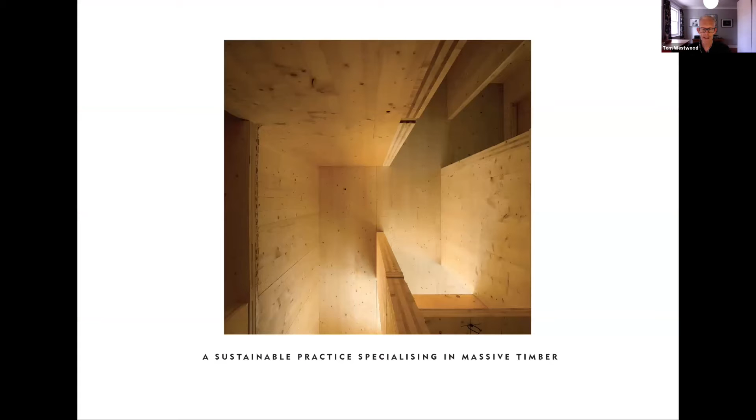So we specialise particularly in mass timber, which Alan will talk a little bit more about, some of the different types that he's used, but it's a range of materials that are timber planks or laminates bonded together to make larger structural elements, be they columns, beams, or panels, to enable us to build with timber, but in a very modern way. So I think what I should really start with is why is embodied carbon so important? I think some of you will have heard other talks on this today, but it does form a really key part of why we are so passionate about building in timber.

Over the last 20 to 30 years, building codes and building regulations have made great strides towards improving the energy efficiency of buildings as they run. The energy used to heat them, cool them, light them, etc., is reducing all the time, and governments are insisting on that, which is a fantastic thing. At the same time, though, legislation has not really come into place to reduce the amount of energy used to actually build those buildings in the first place. And as buildings become more and more energy efficient to run, proportionally, the amount of energy that goes into building them in the first place becomes more and more significant in terms of their overall carbon footprint.

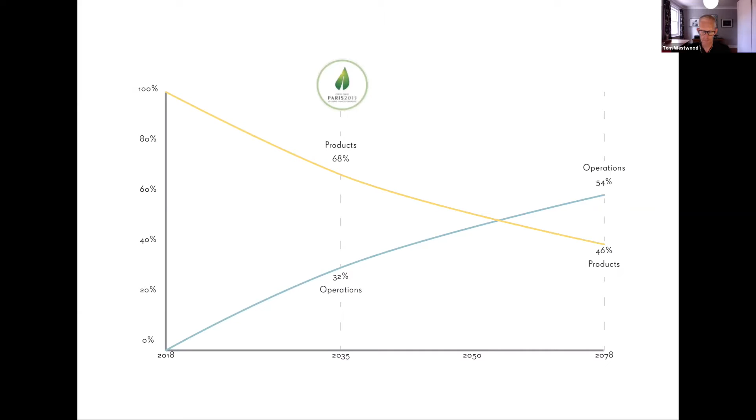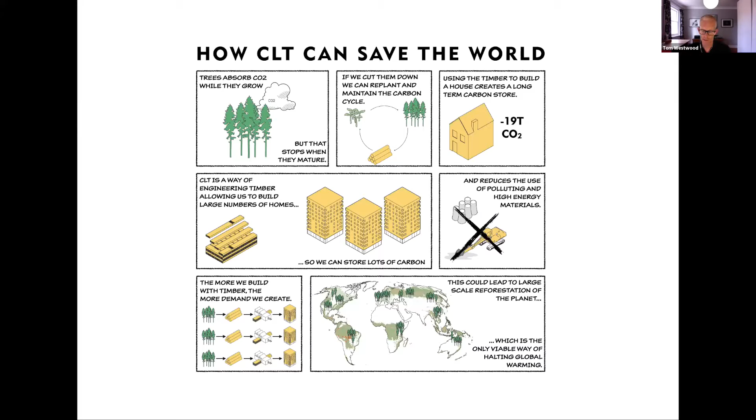And it's really this circularity that is so important with timber. Beyond it growing, then when it is processed, most factories and plants that process timber to be used in mass timber products use the offcuts of timber to actually help power the factories themselves. So they're incredibly energy efficient plants and factories.

Then you can use timber to build buildings on site. And then at the end of those buildings' lives, obviously we hope they'll last a long time, but if they do become redundant, that timber could then be taken apart again and either burnt to make energy, giving it a second life, or actually reassembled into other buildings. So it's a fantastically energy efficient process in total.

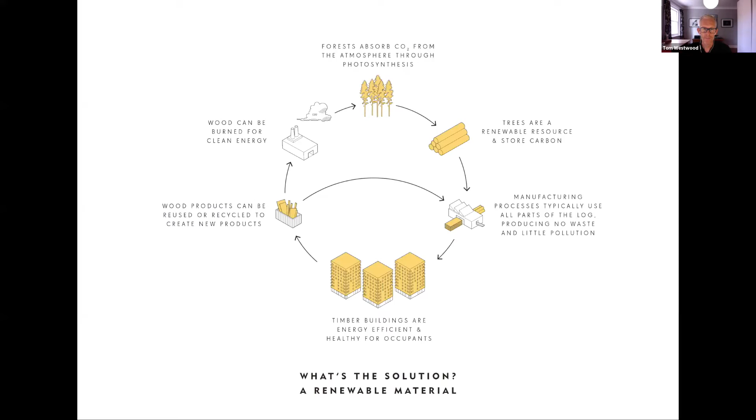So beyond that, working with timber has great benefits for buildings in general. Aside from the fantastic attributes it brings from a sustainability point of view, it tends to be quicker to build with when compared with a concrete building, because you're using prefabricated elements that can be joined together in a more efficient way, quicker on site.

It's a lighter material compared to concrete, 80% lighter. So whilst the building itself, once all the other materials are added, won't be 80% lighter, a completed building in CLT rather than concrete tends to weigh perhaps about 70 to 80% in total of the same building in concrete.

It's a much more accurate material than concrete in terms of tolerance. So because all the elements are prefabricated, they can go together more tightly, which really improves air tightness and reduces snags and defects on site. Fewer deliveries are required to site compared to a concrete structure. So fewer lorries on the road, less pollution, less noise, less disruption from those lorries.

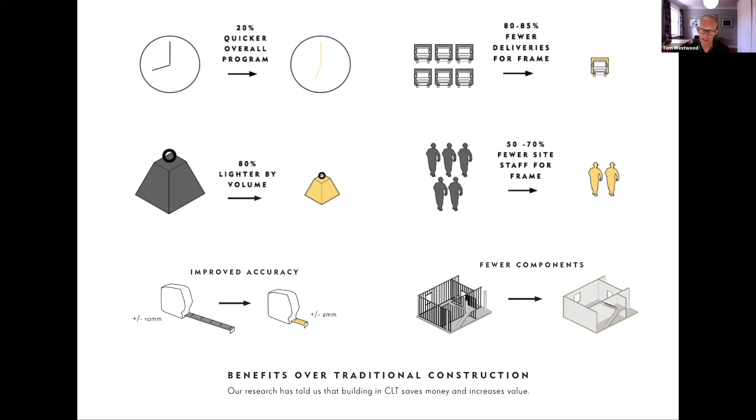It takes fewer people on site to assemble the building. So again, that makes a safer, quieter, and potentially cheaper workforce on site. And there's fewer components overall. Cross-laminated timber particularly can be used for floors, walls, stairs, lift cores, etc. So it has multiple purposes versus a concrete frame building that then needs different materials added to it to get to the same level of completion.

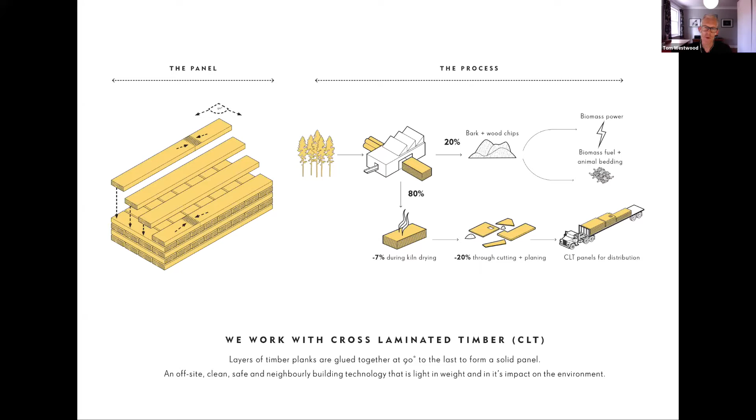So what is CLT? Some of you will know this, but for those of you who don't know the material so well, it's an incredibly simple material formed of planks of timber, very regularly sized planks, which are spliced together to remove knots and defects, and then glued together in layers at right angles to each other to create large panels. I've talked a little bit about how it's processed, but again, to reiterate, the factory process is very energy efficient in itself.

So I'm now just going to go through a few projects that we've worked on over the years, and talk through some of the different sectors, different types of structure used, and how we've experimented and learned from those. Our first major building in mass timber was a block of apartments, nine stories high, Murray Grove. And what we really looked to investigate in this building was how as many of the elements as possible could be in cross-laminated timber. So all of the internal walls, external walls, roof, floor, stairs, lift core, and that means that each of those elements can be relatively thin, as thin as possible. So that was the real concept behind this project.

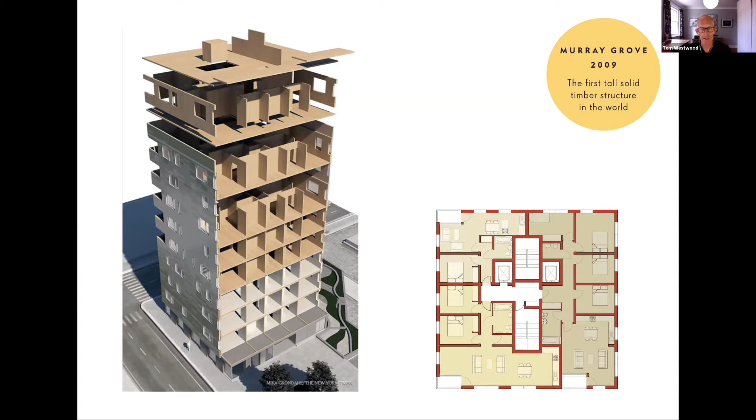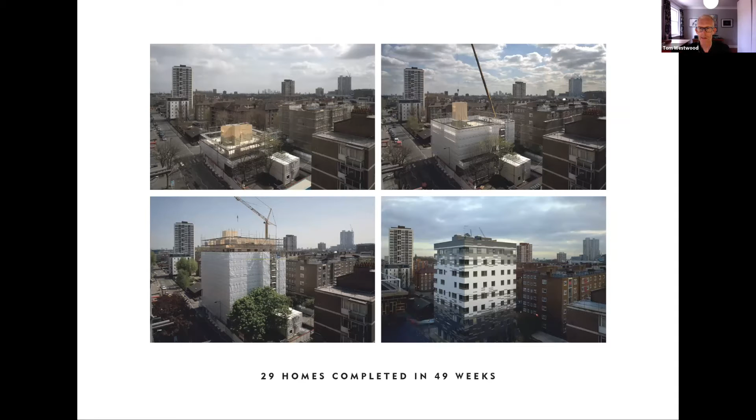And I think one important thread I'll talk about over the next few slides is timber is a beautiful material, as well as being very efficient and sustainable. And in the right circumstances, it's great to show it off. But equally, we think it's incredibly important that the world realizes that it's a very normal building material and can be used for everyday buildings all the time, without having to necessarily spend lots of time showing it off. It can be hidden away and still do a fantastic job, particularly for climate change.

We then, with our learnings from Murray Grove, worked on a much larger apartment block, which again is a very regular kind of building, the kind of building that everybody needs in the world. And there's absolutely no reason why these can't be in timber, and we certainly proved that with this building. Alan will also touch on this building later, as we worked on that with Ramboll structural engineers.

And one of the really key reasons for using timber on this project, and reasons why the client was persuaded to, was because of the lower weight compared to a concrete building. There was a future underground train line under the site, which meant we couldn't use piles. So we had to use a concrete raft, and that limited the total weight of the building. And because the building was in timber rather than concrete, we could build a bigger building. So a great benefit to the client.

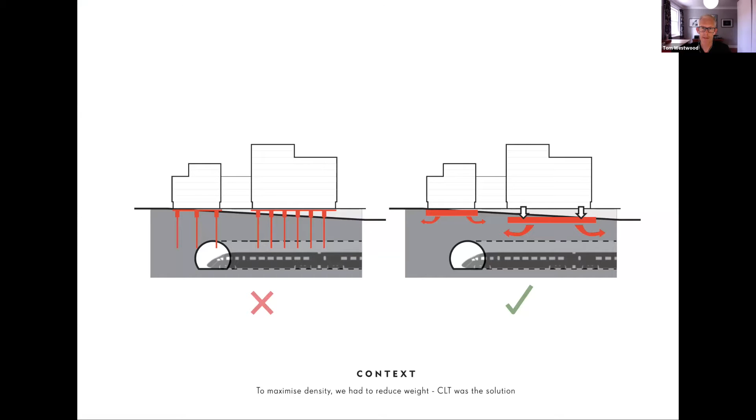So this really demonstrates a few of those benefits. So yes, 25% fewer homes could have been built if it were a concrete frame because of the weight. In terms of lorry deliveries, Ramboll helped us analyse this and worked out that there were 78% fewer lorry deliveries to the site compared to a concrete building.

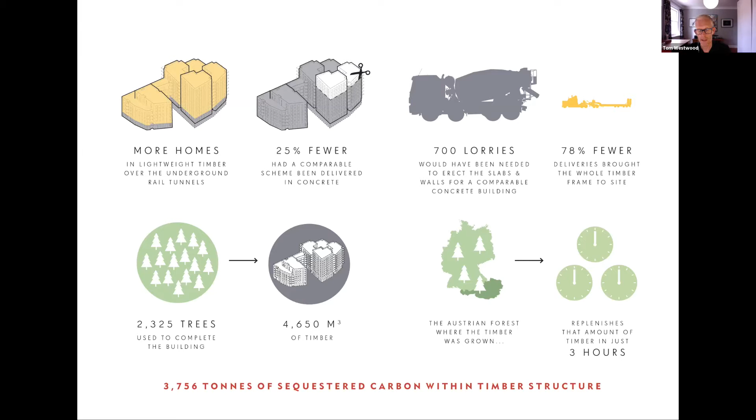And some people are concerned sometimes that if we built everything in timber, would we run out of trees? It's a valid question, but we're an incredibly long way from that. And in terms of the quantum, the trees used to build this building would have only taken 3 hours to grow in the forests in Austria from which these came to build the entire building. So yeah, we're a long way from running out of trees.

So we then moved on to look at different sectors, how we could use timber in different sectors, but also in different ways and in combination with different materials. So this is a building which has now recently been completed, a commercial building, 6 stories. We're using metal and timber together. So a very simple concept, and one that I think will help pull people into and persuade them to use timber, perhaps if they want an entry point rather than going straight to a pure timber building.

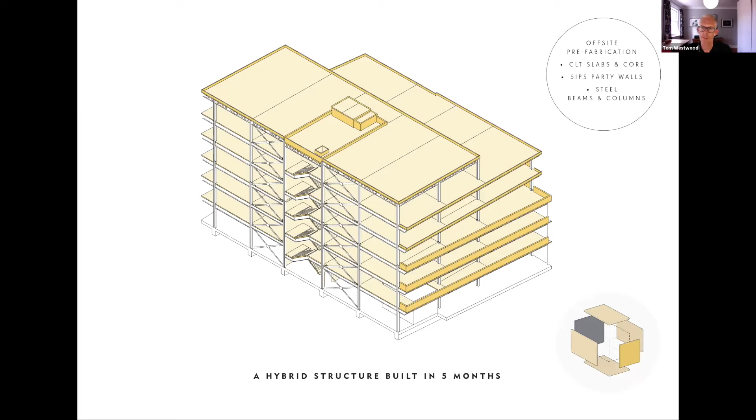So this is a steel frame, largely steel columns and beams, but then using timber for the floor slabs and the core, and really swapping those out for where people might typically use, say, a rib deck or precast concrete. And again, an image of that showing it's a very straightforward construction, very approachable, very easy to understand.

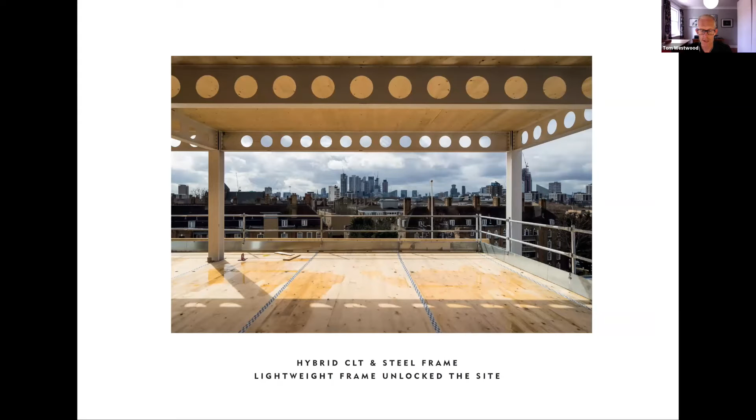We can also use timber to extend existing buildings, which is also incredibly important in terms of tackling climate change and conserving embodied energy. And so in this project, we both extended an existing concrete frame vertically, but also a large extension at the rear of the building to make a much more modern commercial building.

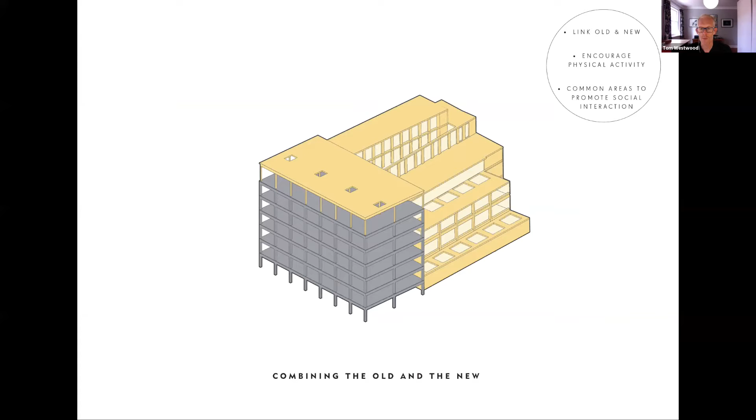And inside this building, we felt like we did have some opportunities to celebrate the timber, to show it off, to expose it. And if you can do that, it's, again, really fantastic material to work with when you can express joints and bits of construction that really add to the joy of it as a building material.

We then also experimented with using it in a factory building. And in this building, the particular sort of system that we used was key. The client and us were very keen to develop a kit of parts, in effect. It's a very regular building, so we built up a kit of beams, columns, and wall and floor elements that could go together to create a very simple construction process. In fact, the whole frame that you see here in the photograph was erected in just 6 weeks on site.

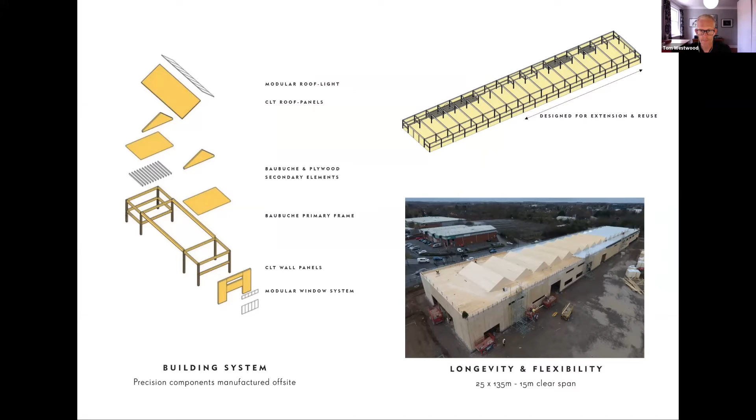And again, in this project, there was a real opportunity to celebrate the timber, to show it off. The client was building this factory for his own business, and so he was keen for it to be as economical as possible. And one way to do that was to have no internal finishes. So the timber is the structure, is the finish. There's no plasterboard, there's no paint.

So great savings on time and money in building in this way, on top of the beauty of what you can create. The timber is a warm, rich material, and fantastic to be able to expose it in buildings, and people tend to respond incredibly well to timber finishes.

So then briefly to talk about what we've looked at beyond that. Well, I've showed a few projects that are mostly working in the sort of panelized and flat pack approach, but you can also combine these elements with either prefabricated pods, or perhaps create a completely modular, totally prefabricated type of building system. And that's what we've worked with over the last few years in some projects.

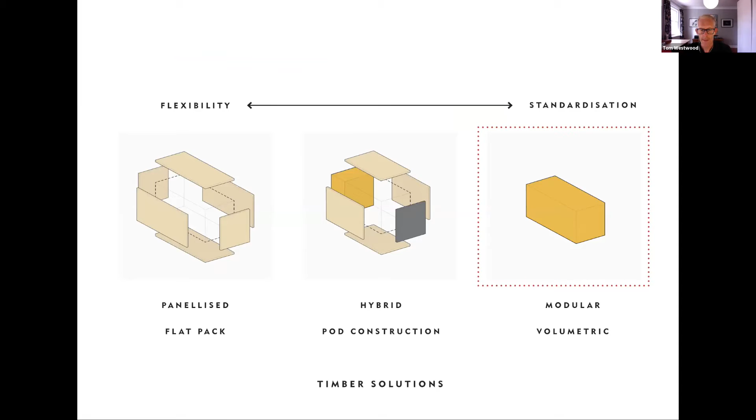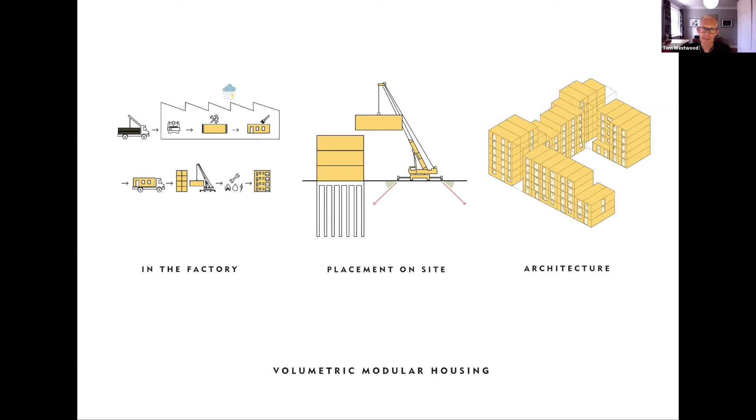So this, again, is a very typical residential apartment block, but in fact is built from timber modules. So very typically sized modules, but built with cross-laminated timber in the factory and fitted out in the same way as other modules. And that gives you all those modular benefits of speed, efficiency, quality control, but also with great advance in sustainability by using timber, and also rigidity is great.

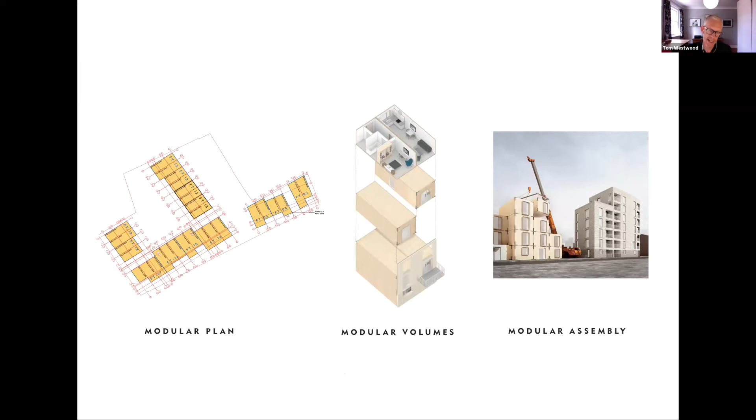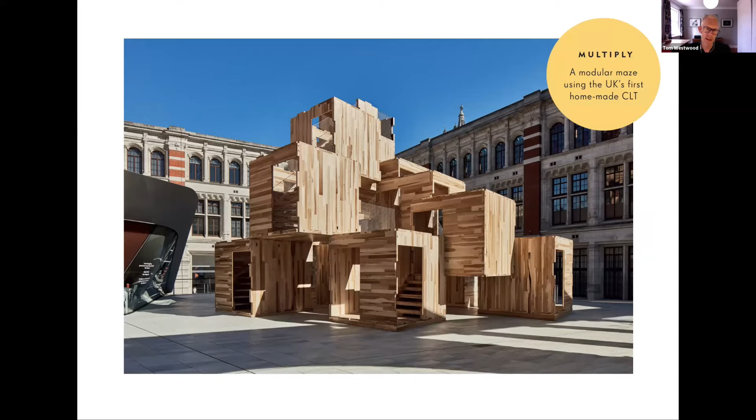And very simply then delivered to site and craned into place. And finally, I just wanted to end with a project that we did, which was a pavilion. And just like this lecture series was really about education and exposure for timber, really trying to demonstrate, particularly to the general public, that you can build in timber, in modern timber. What is mass timber? What is engineered timber? And to get people interested, to get people asking questions, and realizing that there can be a greener future

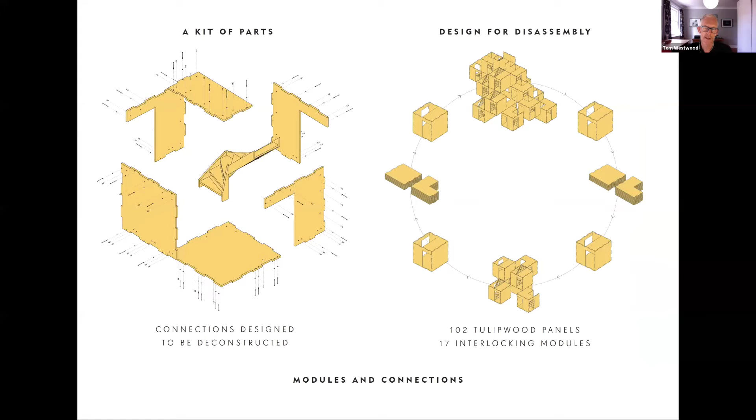for the construction industry. And particularly in this project, we wanted to go that final step into the circularity and look at how elements can be reused. Obviously, there's a great risk with the pavilion that it's up for a few months and then gets thrown away, and we were incredibly keen for that not to happen. So these building elements are all flat pack and all bolted together, so they can be simply disassembled and re-erected. And the timber itself, the cross-laminated timber, was made in the UK, again, to test how feasible that was.

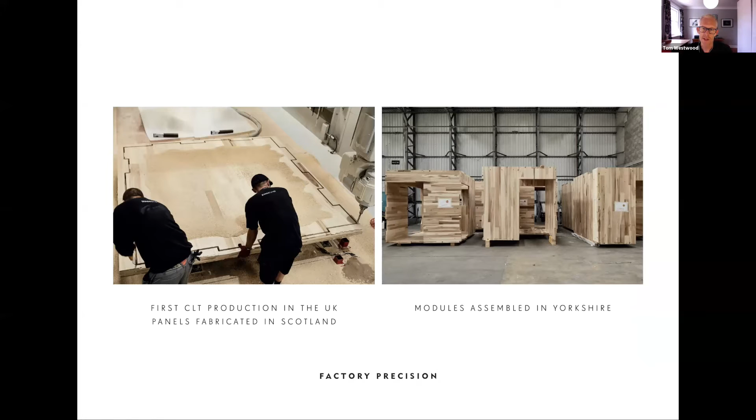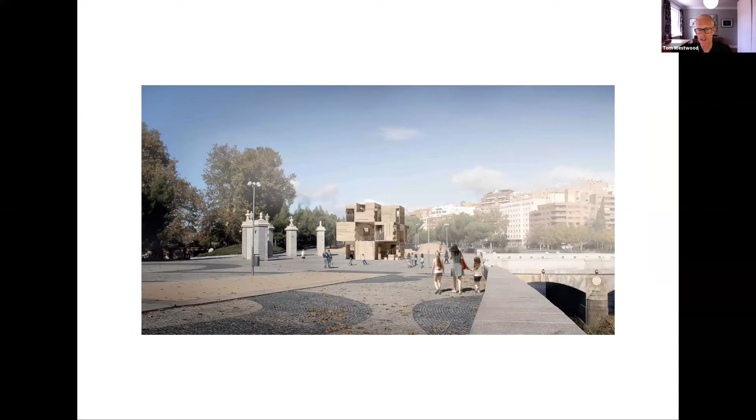And so it did have a few other lives. It went to Milan, where it was erected in a different format for a design festival. And then it also went to Madrid for another design festival. So really proving that whilst it may seem like a pipe dream, you can reuse building elements. Thank you very much.

Great, thank you, Tom. And with that, we'll pass it over to Alan. Hopefully you can tell me if my screen is sharing. Yes, but not seeing the presentation. Oh, there it is. Yep, you're good.

Okay, great, good. So you've really introduced who I am. I would just say I'm a structural engineer with Ramboll for about 14 years now. And very quickly, from the start of my career, I sort of fell in love with timber and using timber as a material to design with, and tried to pretty much focus in that direction for the rest of my time with Ramboll. And over that time, I looked at contributing to books to help inform and educate people out there that this is a great material to use, and this is how you go about using it.

And within Ramboll, because we really love working with it, we want to hold on to our designs and be able to not only do the design strategy at the early stage of a project, but carry forward our design responsibility into the detailed design. So that's designing all of the nuts and the bolts and the screws, which doesn't always happen within our industry, certainly in the UK, and then see that forward through to delivery. And when you do that for a prolonged period of time, nearly 15 years, you really do learn quite a bit, and almost what not to do as well as what to do.

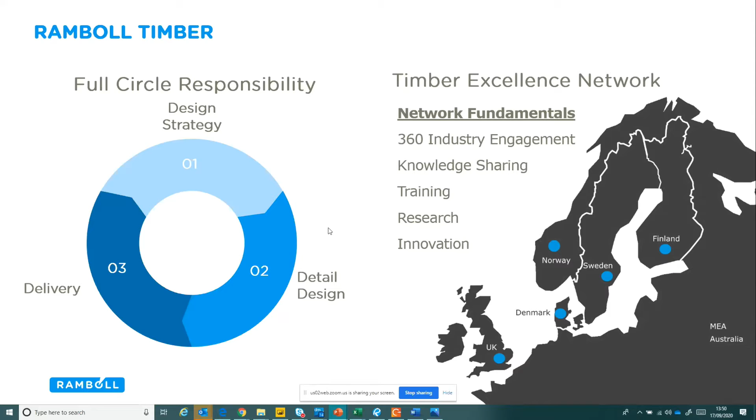And then we're trying to disseminate the knowledge that we learn into a wider community, and look at what's called a 360 industry engagement, and look at all the stakeholders within our construction industry, whether that's through training or research or innovations, to try and spread the knowledge of how to go about designing timber, knowing the pros and cons, and being able to use it in the right manner. And so over that history, we've worked on nearly over 100 timber buildings. It's quite a significant amount of timber volume and floor space that's being created in, I suppose, a relatively short period of time.

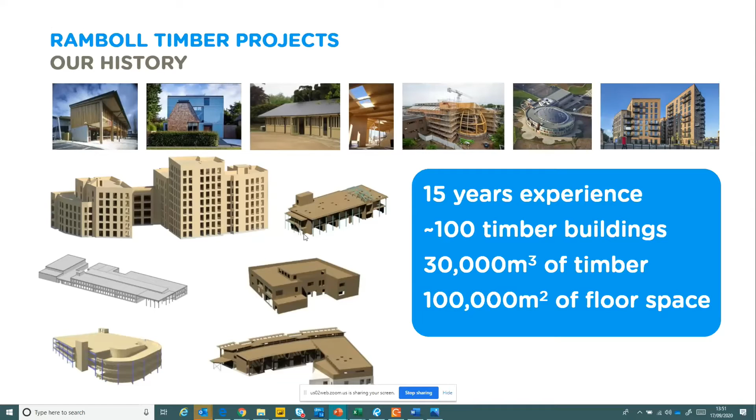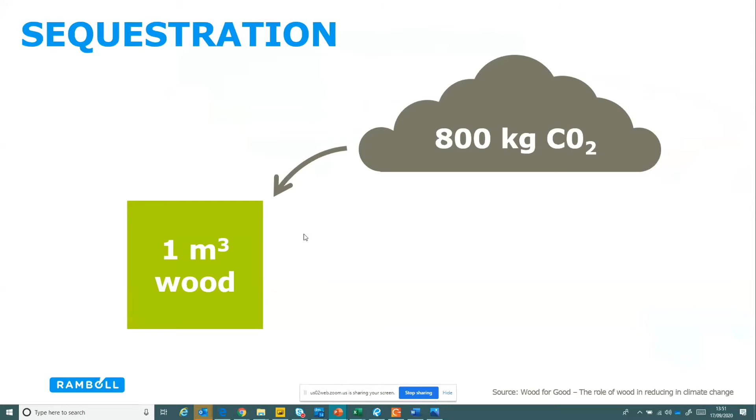And just to echo what Tom said earlier, it's really great to be here, to be able to address the issues that we're currently facing in terms of sustainability. I think timber really can be a part of a solution here, because there were talks earlier about sequestration in timber and how much carbon can be locked within our buildings if we build them out of timber, making them carbon storage. And also being able to compare with different materials within our buildings.

And this is something that we're doing quite a lot these days in terms of carbon accounting, to help drive the decision process. So what is the embodied carbon intensity within your building? How different can it be if you were to use a timber element? Even if it's a lower intensity structure, as Tom covered, but also what carbon is it storing within there, and how does that impact your calculations?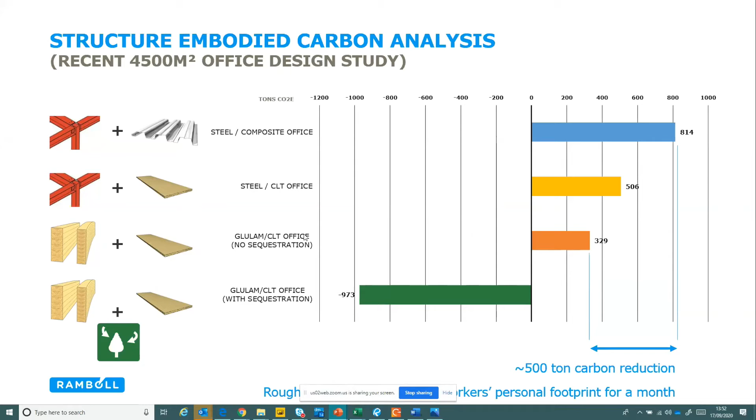Quite recently, we're looking at a tall timber building, which would have 10,900 meters cubed of timber. The client asked us, well, how many trees is that? I said, well, okay, we'll have a look. We did some digging, and that volume of timber is around about 31,000 trees required to fill that timber. Although not all of the tree would go into the CLT in this case.

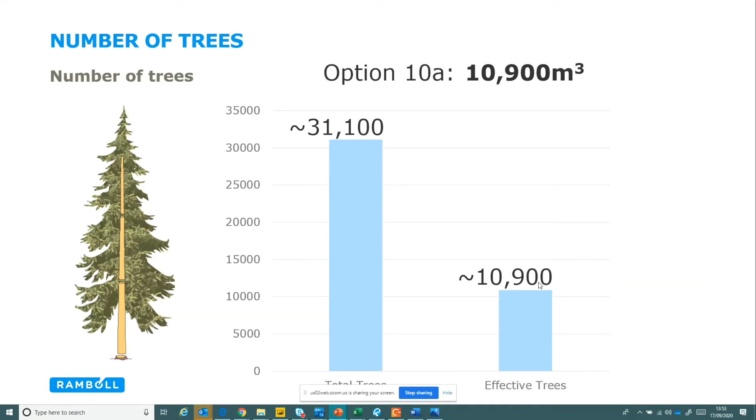So a third of that would be in the CLT, and the rest of it would be in offcuts and various other bits and pieces. So you could say it's 10,900 meters cubed of trees within that building. But the great thing is looking at the figures of how quick that grows in terms of the forest, which Tom also touched on. On a good day in Austria, you get a meter cubed a second, which I think is a fantastic statistic.

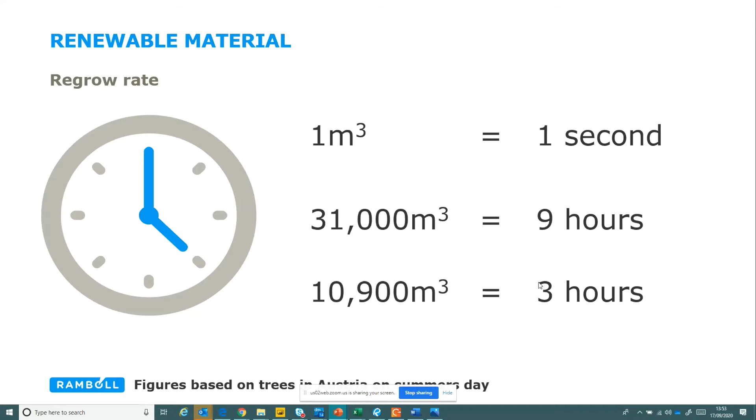So for that particular building, we've got 9 hours for that to completely recover. And the key is it's not millennia like it would be for other materials that you might use in a building. It's hours, less than days. Which is, I think, a fantastic way to look at it. Then also thinking, well, okay, that's a lot of trees, but is it really? If we look at the number of trees just in Austria alone, where most of our timber is going to be coming from, it's barely a blip on the horizon.

So if this large blue ball here represents the amount of trees within Austria that you can farm, the small dot here is meant to represent the number of trees used for that building. And really, I've made that dot bigger because if it was representative, you wouldn't even see it. So you can look at this in two ways. One is we're actually not using enough trees, not using them effectively. And really, we could be using more of them within our space.

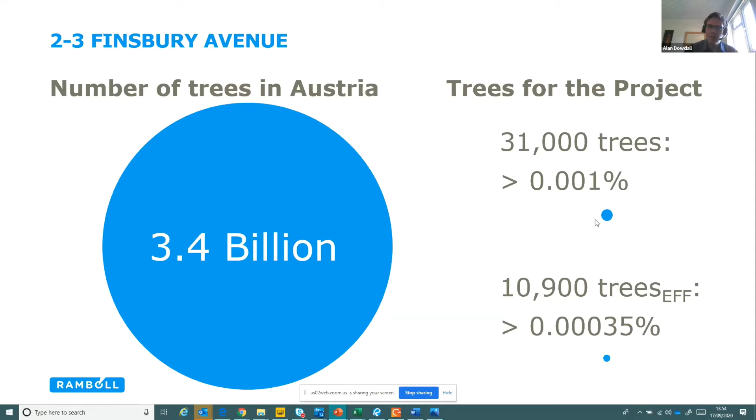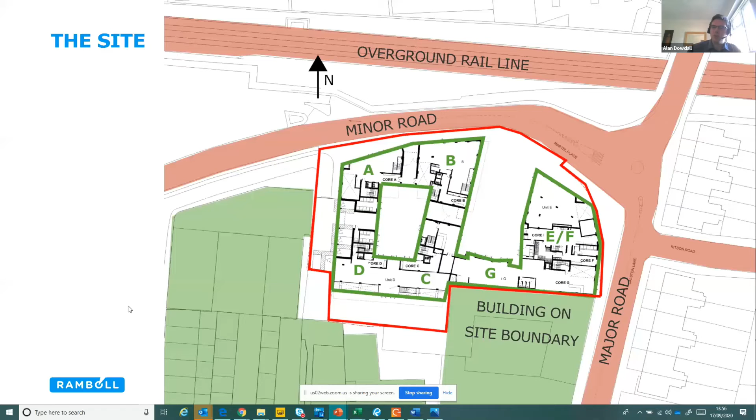What else will they look at? I think adding value to your schemes. So you recognize this picture from earlier with Tom. We worked with Waugh on the structure of this, and that building did have quite a few constraints. If you take the site plan and look at where the tunnels are underneath, they really are going to constrain the load that we can put on. So A, it can't be piled, and B, it can't be heavy.

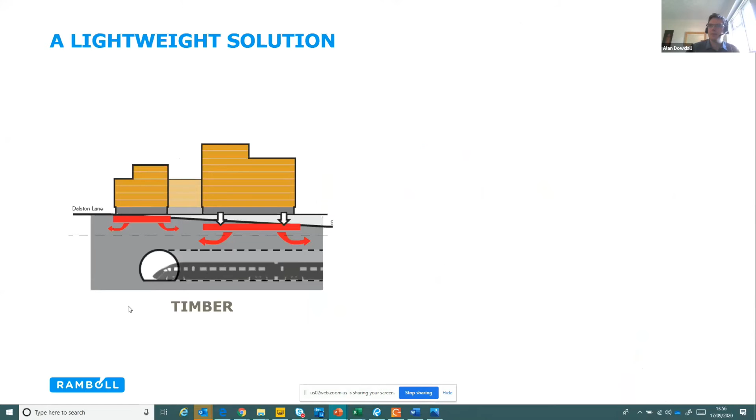So we have a lightweight timber solution that just about doesn't stress the soil enough to impact on the tunnels. If we build out of concrete, then we're losing those top floors. And that's 15 flats. So in terms of value, these are in Hackney in London. They're probably to the value of $500,000 today per apartment.

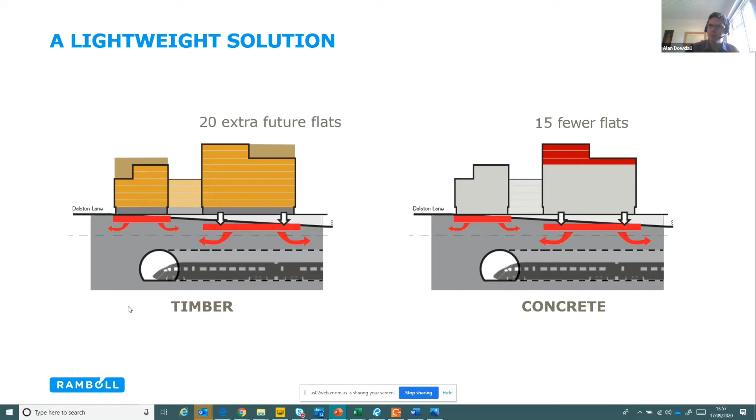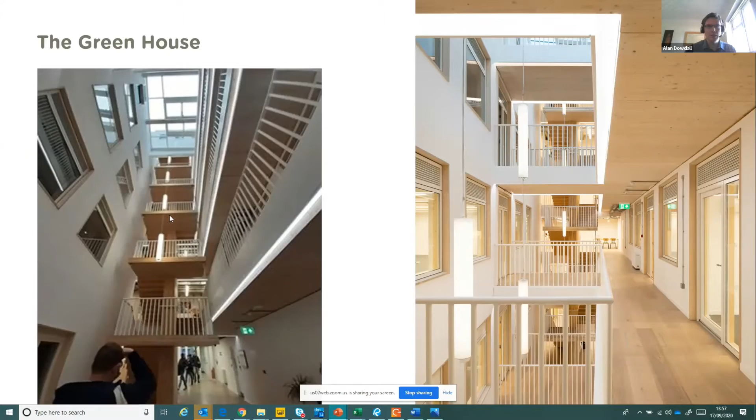But also, looking at the decision-making process of how to get the team working, I think the future of our industry is going to be a different reporting mechanism. I think we're going to end up actually being able to present lots of data to our clients and take that data and form it into certain applications. This is an example of a project app that we built, taking the time, the program, the costs, and the carbon into account for the project.

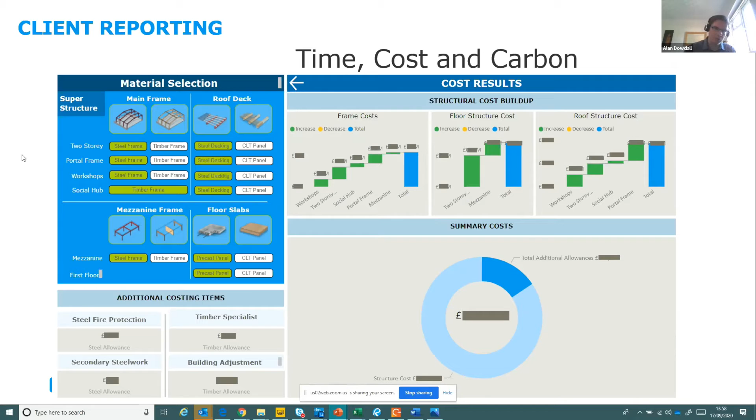I've redacted all the costs in this space, and then being able to give that information to the client so they can pick and choose what one is best for them. So sometimes, timber will come out more expensive, and we want to be able to give them tools. Well, you can still have a sustainable building with timber, but choose where you're going to place that to get the most for your money in terms of carbon.

So I am a structural engineer. So let's look at some timber engineering. In terms of what I see as the toolkit, the bits that we're going to form our building out from, I see the gateway into mass timber has been a combination of these. It's LVL, which can form your beams and your columns, or a floor panel. GLT, glue laminated timber, also beams or columns, and CLT, which is also extremely popular to form your panels,

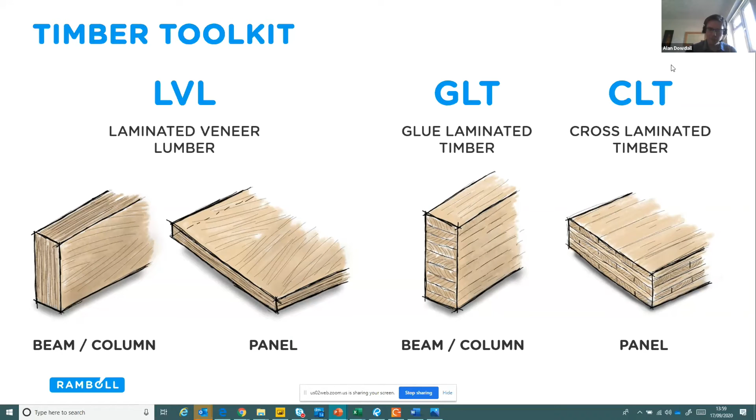whether that's walls or floors. But also combining those elements together to create different structural products to increase spans or increase strength or do long span roofs is also quite interesting. So you can really have a lot of flexibility in the material to do what you want it to do.

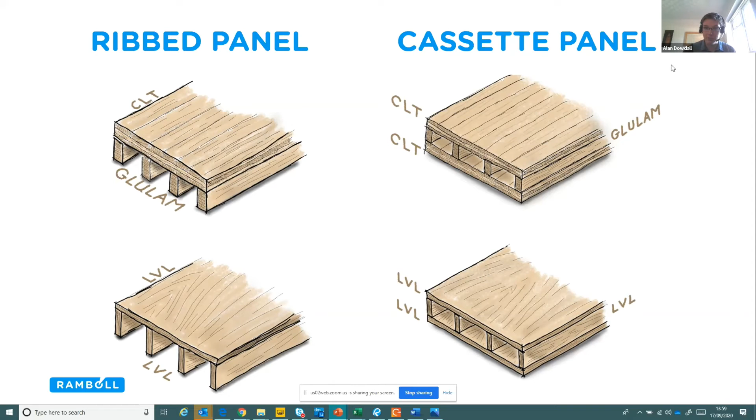So your structural elements. So when you have your structure, then you have to fit it around the building. And in terms of building, there's going to be potentially lots of services. So how do you weave that around, say, your service zones? So this is a snapshot of the Stora Enso office concept that we worked on a few years back, looking at creating a flexible office space that can integrate the structure with the services without having to go through those beams and that zone, to create a space that is flexible and quite usable.

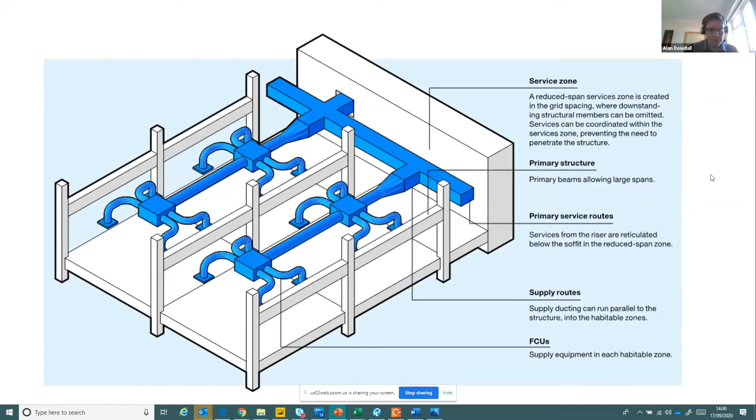When I think of timber and design, my first thought is, well, how are we going to stitch it together? And I think of that because the impact of your connections on timber is probably more so than concrete or steel. How you stitch it together I'd say is a very important thing to consider from the start: what's your connection philosophy. I think you can be more forgiving in terms of concrete, where you could add a bit more rebar, or steel, where you can add another bolt and it will increase quite a bit.

And thinking about those connections can really, for your timber building, impact the speed of your construction and how much hook time you've got to have with your crane, the number of people you have on site, and ultimately the cost. That's the wrong slide.

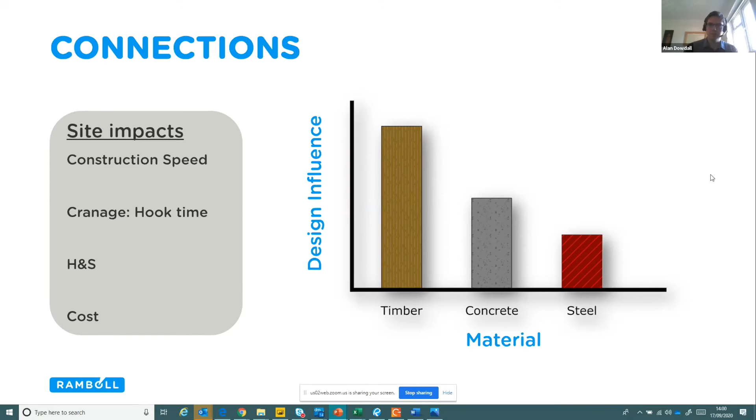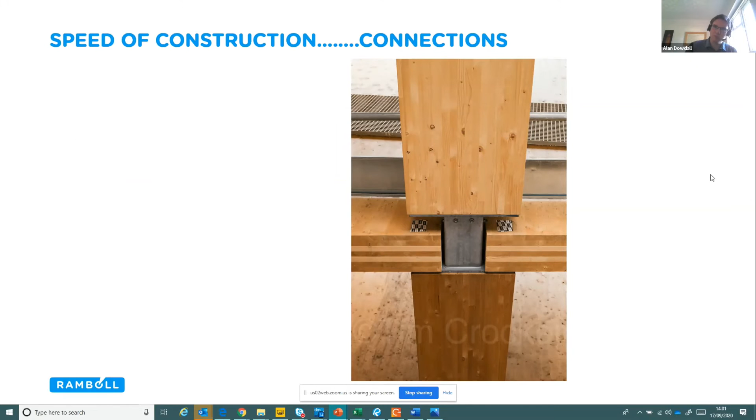So how those connection types can really, like this one, this is again the Green House building, where being clever with our design, we prefabricated the metal end bits that could then just sit on top of each other. So the site bit was just a quick bolt, quick release system almost, and that saved about 3 or 4 weeks on site alone, just being able to quickly install all of these columns in place.

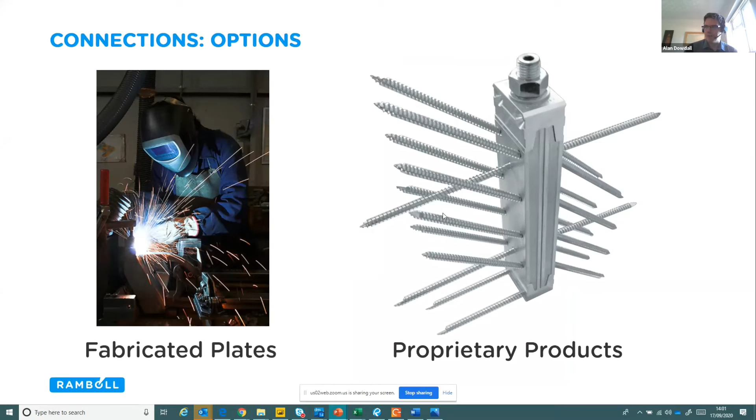So generally, when I think about connections, I think about fabricated plates or proprietary products. They're the general two that come up. And if you're going to use fabricated plates, they're usually more cost effective as a unit of material, but they're a lot slower on site. So you will struggle to get them in place at the same speed as your proprietary products.

So you have an equation almost to work out. Is your project of a certain size, where if you did fabricated connections, then it's going to take a lot of time to install, in which case it might increase your costs? Or if it's a proprietary connection, yes, they're more expensive, but because you've got a lot of them and you've got a lot of speed to get through, then it might be more cost effective for you to do it that way.

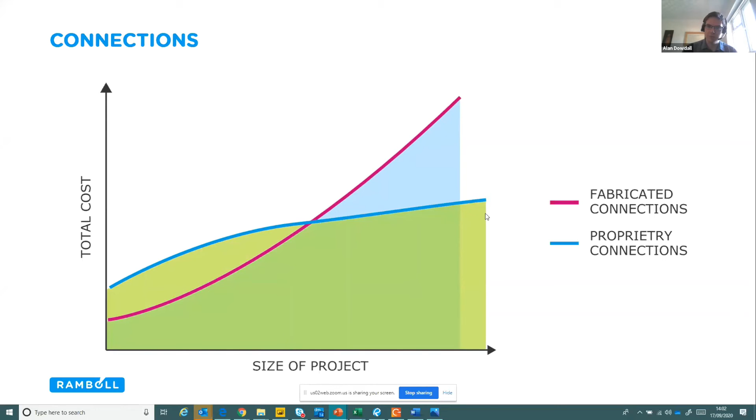Now, when you think about connections and you expose the timber, you're into a different ball game altogether, which is a lot more fun, into how to connect pieces together without making it look like they're actually connected together, and that really can absorb a lot of time to think about stitching it all and how you can hide things in place, and obviously, designing for hidden connections with the fire time required for that, and it can be a little bit more expensive as well.